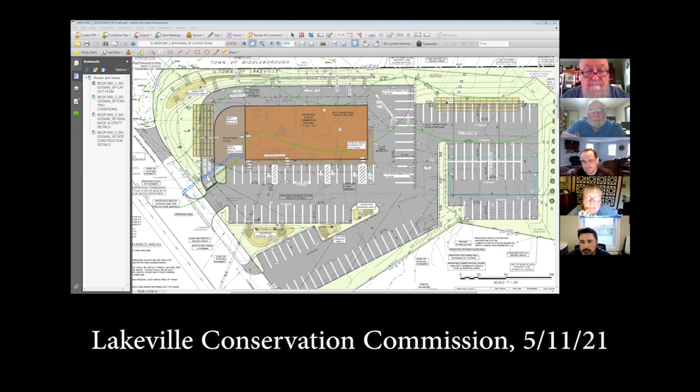And there is this drain pipe right here and this manhole to redirect the flow into this other drain basin. This drain basin is completely within the buffer zone. The location where I can see a Stormceptor to be added, if the board wants this treatment to have additional TSS removal, will be at this drain manhole. It's a matter of just replacing the manhole with a Stormceptor. So the flow that's coming out of these 3 basins goes through it and it provides additional TSS removal.

But again, we're showing that it is an improvement over what's on the site, even though this parking right here, I don't know if everyone can see this dashed line of the existing pavement. This parking right here is additional pavement on the property outside of jurisdiction for the Conservation Commission. But the review is good for any other department of the town. And yes, this project has to go through planning board.

It will have to go through the planning board to review the lot coverages and the incentives to add 10% to get to 60% and an additional 10% to get to 70%. There's a little bit of reduction in impervious surfaces by removing the driveway in this location. But still, that's another board and they will review this plan once they get the full application before them. But if the board chooses to, that could be a condition that the outflow out of these 3 vegetative basins gets intercepted by a Stormceptor. And if the peer review wants to add his comments to this, I could agree to a condition that the Stormceptor be added to that system.

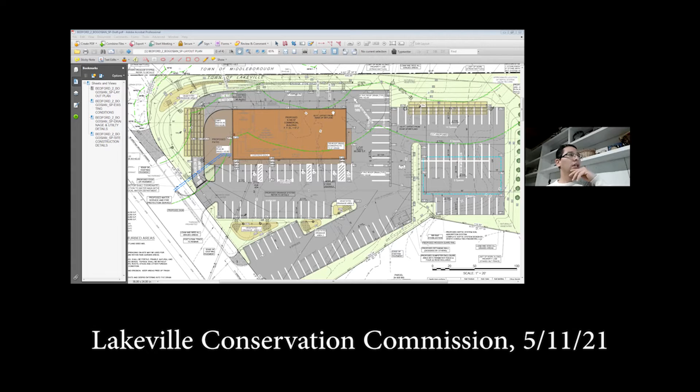The roof for the whole building will be discharged into subsurface, so that will have enough TSS removal, and the roof runoff is considered a clean runoff, so that is managed properly. So the area that's in question is the trade-off between the back parking between the building and the retaining wall as a trade-off to the front parking, which is mostly existing today, that's going through the three basins.

I hear your argument. I understand what you're saying. You're saying that you're treating the existing pavement and it is over 80%, and the trade-off being the newer pavement, you're treating to less than 80%. Is that what you're proposing? For the portion on the back of the building, because the upper parking lot will have the Stormceptors and the subsurface leaching. Right. Yeah, which it should, because it's almost entirely new pavement.

In my opinion, if there's something more you can do in the back, it is better. Personally, when I design projects, even if it's redevelopment, I try to meet the standards as if it's new development. You don't know exactly what the use is going to be here for the trip generation. So it's up to the commission, but my feeling right now is if they can do more in the back, that would be preferable. I think that's more desirable.

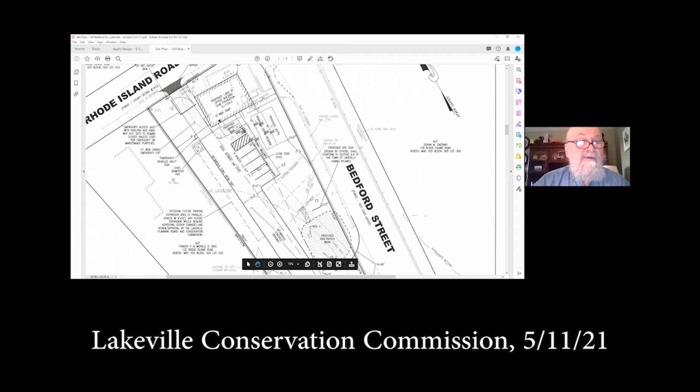A somewhat related question. Yes, sir. I'm sure you must have heard from MassDOT. What are they planning on doing with that stretch of Rhode Island Road out there? Well, from my understanding, I'm not sure that they're gonna be taking anything on this property. I've looked at the preliminary plans. I believe they were done by Beta Group years ago. So as far as what I'm aware of, we'll be submitting these to the state with the MassDOT process. And if they have anything updated, they'll put me in touch with the project engineer and the outside consultant that's working for the state. And if there are any major changes, we'll be representing them to the town, or at least letting the department heads know of it.

So there's no likelihood that they would be widening the road and adding more impervious surface? I'm unaware if they're going to be taking more as far as the right of way is concerned. I have not been informed of that. My understanding is, though, that the intent is to widen the pavement and add a bike lane, if I understand correctly. And they're going to be bringing it up to Clear Pond Road, I believe, was the extent of the improvements through the intersection.

Anything else, Joe? Nope. All right, Nancy? I'm out. I mean, I recuse myself, so I can't comment. Oh. Well, yeah, you just can't vote. You can comment. And you definitely can as a citizen, Nancy.

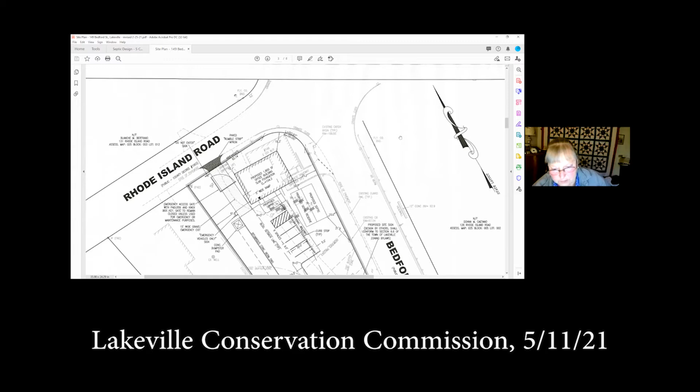It's certainly an improvement. I like that the buildings move back from the street because there's no visual. Everybody complains about that corner being dangerous, so the buildings moved back. I like that. I've been on this site many times. And I did hear comments from other people about the wetland, but a lot of that, the wet place is just the existing drainage easement, and the wetland's way in the back. So,

this seems like that dilapidated house has been there for a long time. It will be a breath of fresh air to see something new there. Yeah, it's been there forever. Right. All right. Thank you, Nancy. Yep. John?

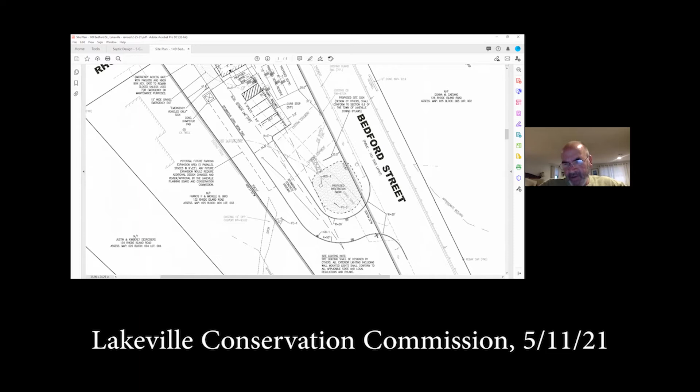So is the elevation of this road going to change? The elevation of the existing? Are you building it up, the parking lot, or? Oh, yeah, there's definitely elevation changes. In fact, we're building it up quite a bit. Okay. Right now, as you can see, it's kind of a mishmash, but at the roadway up in here, we're talking about an elevation 102, and then it drops down to a 97 over a bit.

So what we're doing to meet stormwater requirements, we're bringing it in and we're bringing this up quite a bit. So in this point right here, it's going to be brought up roughly 4 feet. Okay. And then over in here, I believe that is a 96, 97. So that's going to be brought up 5 to 6 feet. So yeah, there's some substantial dirt being brought in to get this parking lot and everything to work properly.

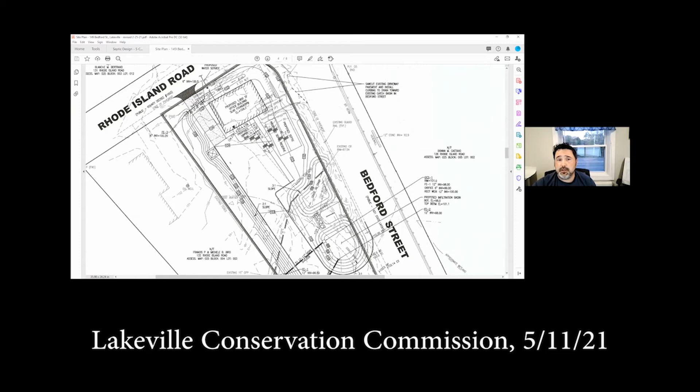So do you have siltation shown somewhere on this? Yes, sir. Can't see. No, that's okay. We have several sheets. So on our erosion and sediment control plan, we show silt sock, silt fence line that runs all along the side here. Pretty much wraps the entire property at the limit of work.

We also have a proposed construction entrance with the riprap pad and details, dewatering area, concrete washout area, and vehicle storage area, which is where they park the equipment at night. Yeah. We have an operation and maintenance plan for it, construction sequence detail, and all the other details that I'd normally present with you. And they'll keep that road clean on a daily basis?

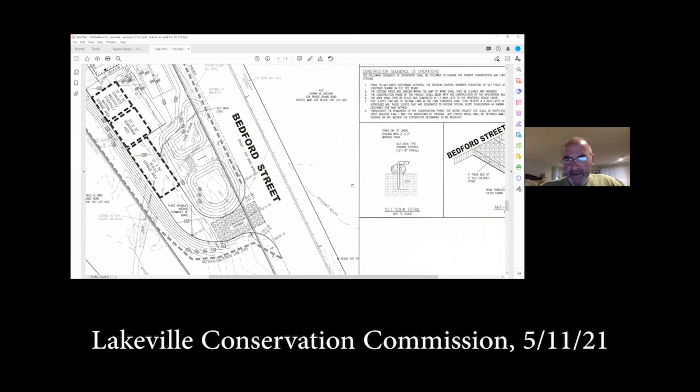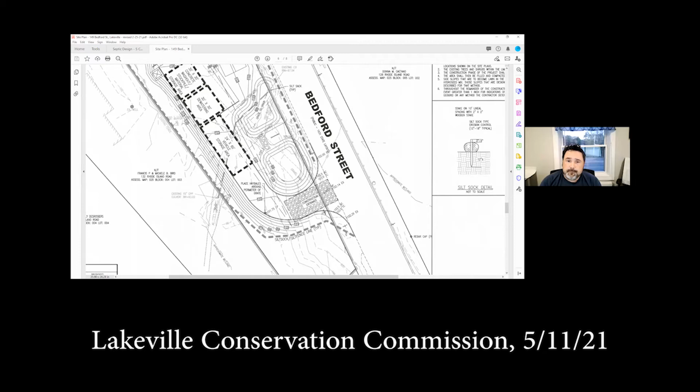Yeah, again, obviously, I'm not out there with the broom myself, but... No, I get it. MassDOT will be all over them if not. Yeah. And part of the MassDOT permit is wordage covering keeping it clean, doing work appropriately, and the like. Yeah, that's all I have. All right, how about you, Josh? I have no comment. All right, very good.

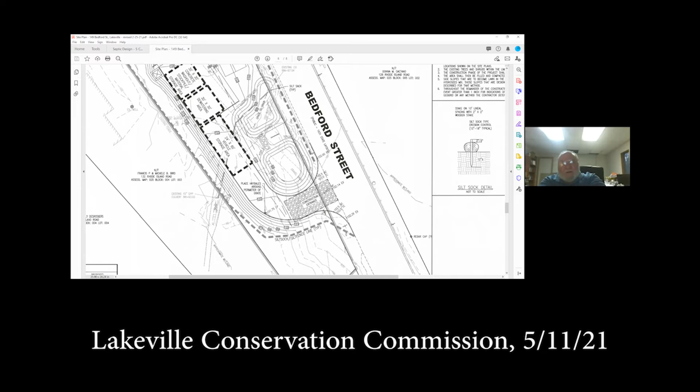So does anyone else have anything to say? Are there any abutters or anyone with something to say about this project? Oh, I guess everybody got worn down. All right, then do I hear a motion? Now, this is an RDA. This is an NOI. It is an NOI. Well, it is an NOI.

Okay, make sure. Okay. I make a motion that we close the hearing and issue an order of conditions to allow the work to go forward. I think this would be, correct me if I'm wrong, Nancy, this would be the 3? No, that's RDA. It would be all our standard conditions for before, during, and after construction. Okay. What she said.

Okay. Do you have a second? I'll second that. Any other discussion? Hearing none. All those in favor? Joseph, aye. Nancy? Recused. Oh, I'm sorry. All right. John, aye. Josh, aye. I vote aye. All right, so the motion carries. Thank you all. Thank you.

All right, before we continue, Jamie, if you don't mind, just for a second, as I know you're up next, but we did shift the agenda a little bit, and I just realized I didn't mean to overlook Brittany. I see you're down at the bottom of the list here. Do you have a long drive ahead of you? Oh no, just in the spare bedroom. So I'm happy to wait. I don't mind, whenever you're ready to take us. Okay, I'm sorry. I just didn't want to overlook you. No worries. Thank you though. All right, you're welcome.

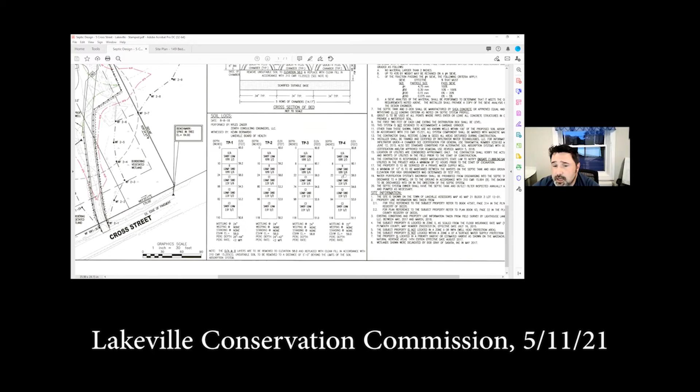No, so can you see the test pit logs that I have on the screen? I got them in front of me. All right, perfect. So we're removing, just like you said, the OA and the B. A sandy loam has to be at least 50% sand, and then it's a mixture of silts and clays. Underneath that, we have a loamy sand, which is actually 85% sand, and then can be some silts and clays. It's a much more coarse sandy material.

We're going to be taking those materials out and bringing in a Title V sand for under the septic system. Septic sand. Yep. And because we have less than 2 minute an inch perks in the loamy sands, we'll be keeping the 5+ feet groundwater separation for treatment below that leaching field. Yeah, I see that. Less than 2 minutes per inch. And the perk depth was down to 44 inches on test pit 1, 42 on test pit 2. And I guess those were good enough that you didn't bother with 3 and 4, right?

You need 4 holes and 2 perks for new construction. Before it used to only be you needed 2 holes with the perks on each, up until, I forget, 2000, it changed. Okay, just checking on the soil there. Okay. Mr. Chairman, I have one more question.

Did we lose them? Bob? No, he's muted. Did we lose Bob? He appears to just be muted. Well, I'm assuming it's all right. Okay, there he is. I'm back. I got kicked off there for a second, but I'm back. Okay, I had one more question.

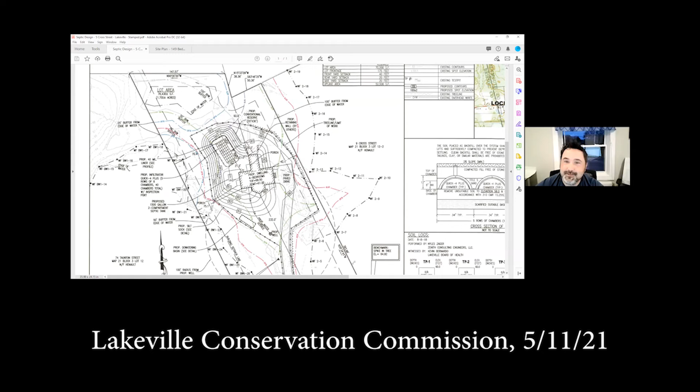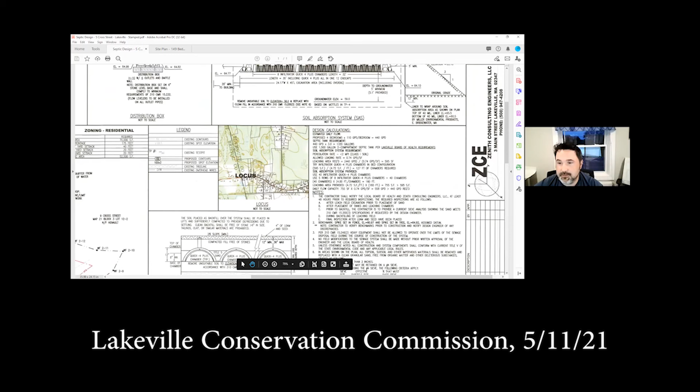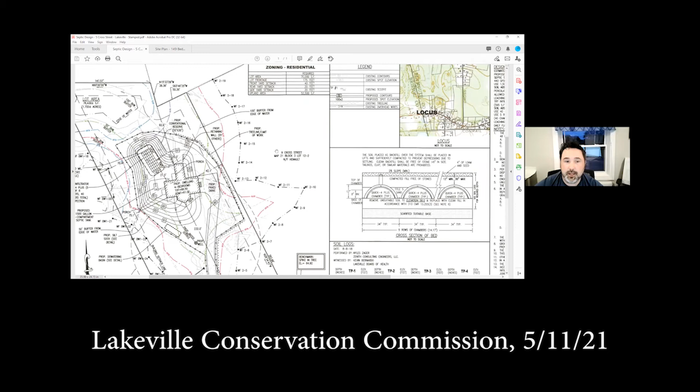Sure. I couldn't tell on the locus, Jamie. There's 2 lots for sale. Is this the one closest to Cross Street, that's got the little dirt road going into it, or is it the farther one back? This is the one with the dirt road going into it. And that's the lot closest to Taunton Street? Taunton Street, yes, I believe that's the case. I believe the lot that you're thinking of is right over here. The other lot is further back. There's 2 for sale signs and 2 little areas where you could probably squish something in. Correct. I believe the other lot that you're referencing is over in here.

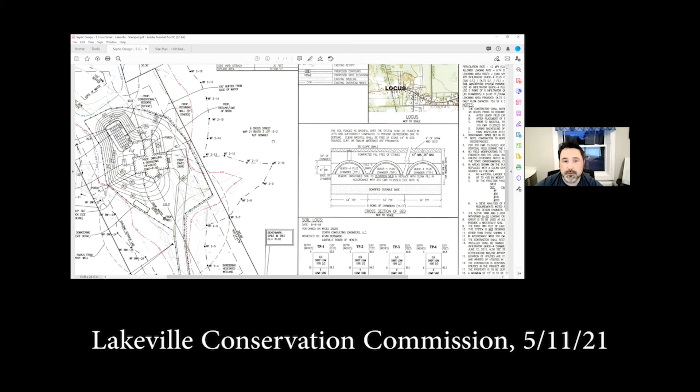Back further? Okay, yep. That is Tickville - I have 5 ticks on me walking back in there. Yeah, not a good place to go without some spray on.

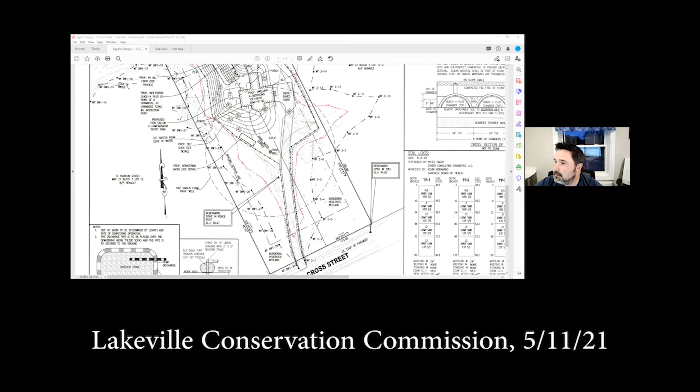Okay, I'm done. I'm going to verify the lot location for you because we did have a Form A plan, and I just want to make sure I'm not misspeaking to you, Nancy. All right, can you see this new plan on my screen?

All right, Nancy, John? I don't have anything. Okay, thank you. And Josh? I'm all set, all set. All right, good. So any other questions, or are we ready for a vote?

I'll make a motion that we close the hearing. Any abutters? No, no abutters. All right, go ahead. Close the hearing and issue our standard orders of conditions for before, during, and after construction. Everything will be included in that.

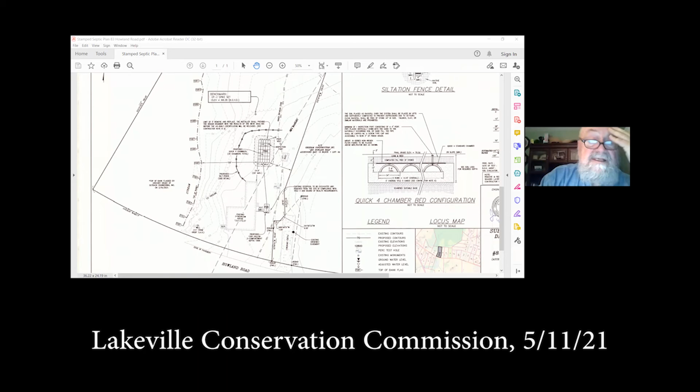Existing cesspool will be removed, and that's where the new system will go. As a matter of fact, I think I'll share the plan, give me a minute here. You can see that? Yep, okay. Can you bring that up in size, please? Yep. That's good.

This shows where the existing cesspool is that'll be removed. The new tank will go in and connect into the existing house, and the field will be located out back in the rear yard here.

It's located there because the well is in the front, so that makes it over 110 feet from the well. There's also a public well at the high school, and that line here is the IWPA, the 400-foot buffer from that public well. So we kept it on the outside of that buffer zone.

The erosion control is there to keep anything from flowing down towards the stream. The whole property is within the riverfront area, so we tried to minimize as much disturbance as we could and keep the system as close to the house as possible. The area there now is just brush and some lawn.